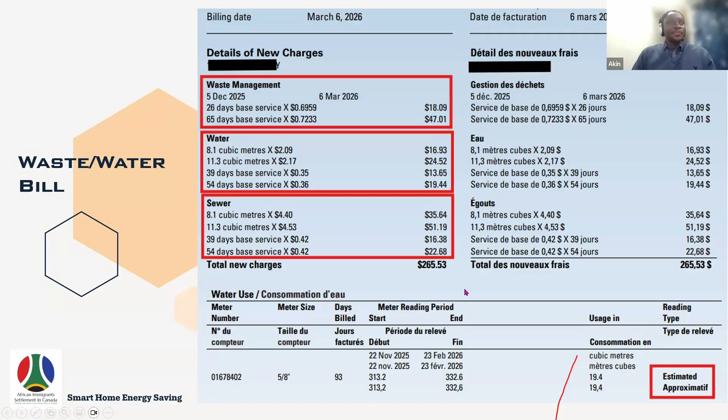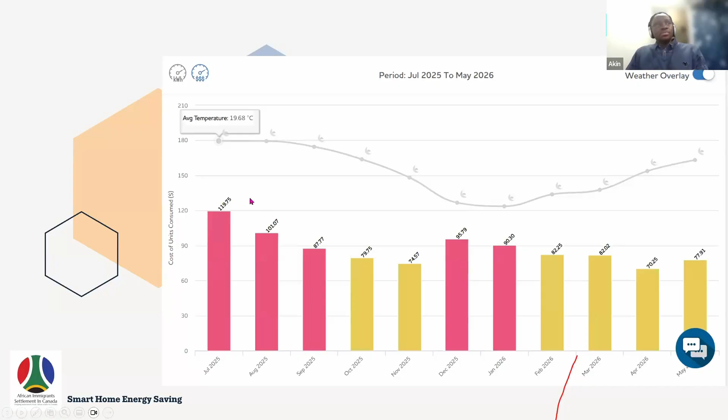For example, if we are using an electric stove to cook our food, whether it is summer or winter, we still use it. The only thing that may change during this time is maybe during longer nights, we may need to turn our lights on for a longer period of time. And maybe because in the winter people stay more at home, it may increase energy use for appliances, for watching TV and other things like that. So the idea of this graph is just to show how weather interacts with energy use.

For electricity, it's going to water heating, to appliances, to cooling, and to lighting. So that is where the remaining 40% is going. So now, if I want to save on natural gas, which is basically for heating, what are the areas in my home that I'm going to look at? So that's going to happen in the next slide.

So as we can see, this picture at the right hand side, this is the building envelope. When I say building envelope, I'm referring to everything that encloses your home: the wall, the windows, the doors, the floor, and the roof. So if you look critically at this picture, we see how much of the heat we have in our home is going out through each of these different media.

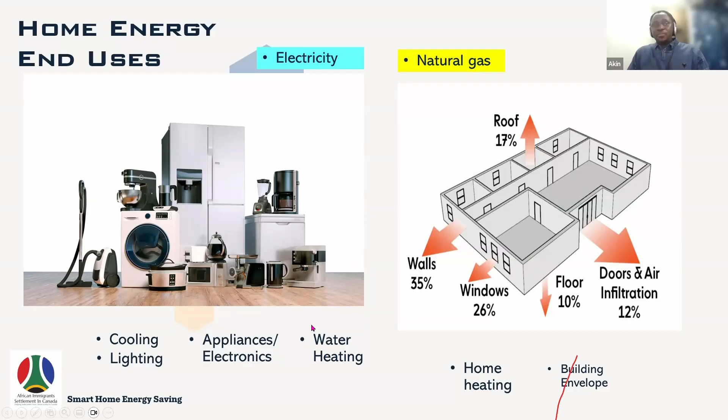So the next aspect is electricity. Your appliances, lighting, water heating, cooling, this is where the electricity is going to. So if your home has a natural gas boiler for heating water, this might not be applicable here, but I believe most homes are using electric water heaters. So if I want to save on natural gas and electricity, what are the things that I'm supposed to do? First of all, we deal with natural gas.

As we explained before, all the natural gas is being lost through the envelope. So the building envelope has to do with where natural gas is being used. So if I want to reduce natural gas, I'm going to deal with air leaks. Where are the aspects of my home where I see leakages? Maybe if you are cooling your house during the cooling period as we are now, we want to retain the cooling as much as possible in our home. So we need to seal up. Maybe there are gaps in the window, gaps in the wall or wherever. We need to deal with that. There is actually an instrument that you can use to see if you are having leakages in your home.

Another thing is insulation. Insulation is just like what is inside your wall to reduce movement of heat between outside and your home. So we need to work on the insulation to reduce the amount of natural gas we are using. Also, if you have a basement, we need to pay attention to it. If we find out that there are some leakages through the basement, the windows of the basement are not properly locked, that is enhancing some infiltration into the home, we need to pay attention to that.

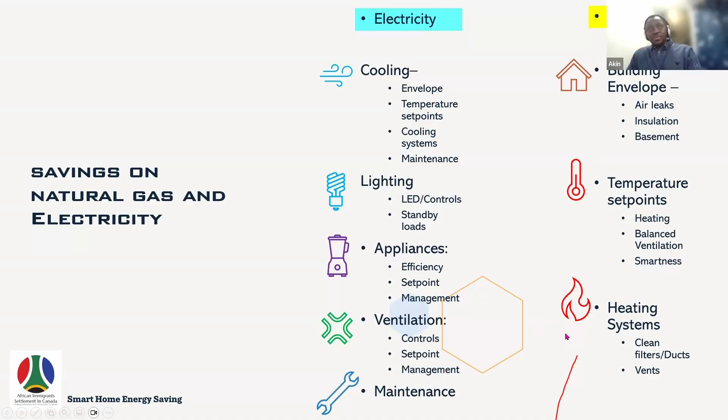So this area is mostly for people that are interested in buying a home, or you have an old home that you want to upgrade to enhance energy management in your home. So these are the areas that we can look at when we are buying a new home, or when we have an old house and we want to upgrade it.

So when people want to do an upgrade for a new home, in most cases we always concentrate on physical things like, help me change this doorknob, I want this type of cabinet, I want this type of floor. But in most cases, we don't pay attention to how we can upgrade our new home to reduce energy use. If I upgrade my cabinet, I just upgrade it for aesthetics, just for it to look beautiful. It's not making me money. But any upgrade we do towards energy savings, those are the ones that are going to bring you money.

When I say bring you money, if you spend a particular amount of money, for example, I want to build a house now. A builder will always build your house to the minimum building code, the building requirements by the city. So they don't go beyond the minimum for their own profitability. So it is left for us to say, I want to go a step further in my new home to reduce energy use. For example, if you want to put insulation on your wall, I think by building code R22 is the minimum. That is what they give you in your house.

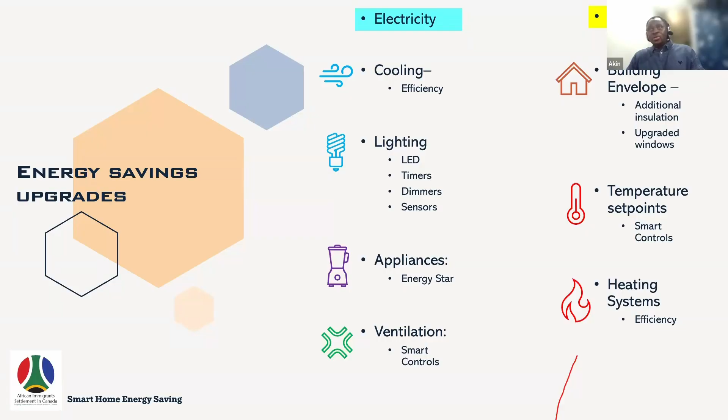So for us to stay comfortable at home, we need fresh air because most homes in Canada are tight, meaning that air is not just entering as draft or leaving the house. So if we are not intentional about how we are bringing fresh air into our home and how we are taking out stale air, we might be having insufficient oxygen in our home, which is not healthy for us.

Apart from that, humidity is also a very important consideration. In our homes, the humidity is basically how much water we have in the air at home. If it is too much, it's not good. If it is too dry, it's also not good. So we need to strike a kind of balance. So typically anything between 35 to 50% is good. So when we have humidity in our home that is rising to 60%, which you can also see on your ventilation control on the screen, you can see what the humidity is. So we should pay attention to that.

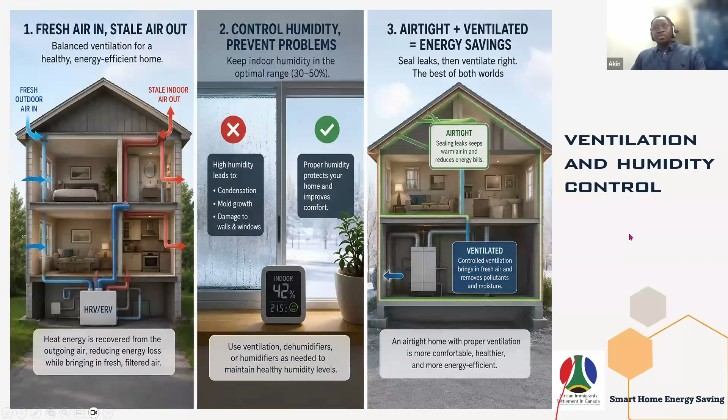On the other hand, if you are having a lot of condensation on the wall, on the window, everywhere, you touch your sink or your toilet and you are seeing condensation everywhere, it's an indication that there is too much water inside your home. So in that case, you will need a dehumidifier to reduce the excess water in the home. So both ventilation and humidity, they go hand in hand.

I've talked about why ventilation is important, so I will quickly talk about mechanical ventilation. So there are two ways we can control ventilation in our home. It's either we use mechanical ventilation, which is let the machine do the job. Just set the ventilation system. If you need fresh air at home, you can set that and just ensure that you have enough oxygen and the indoor air quality is appropriate for the occupants of the home.

The other one is natural ventilation, which means you don't want the machine to do it, you want to do it by yourself, which is basically opening your windows or doors and letting fresh air enter. The difference between the two is when you go for natural ventilation, you are saving energy, right? You don't let your fan run to circulate the air.

But when you allow the ventilation system to do it, there is always a filter that the outdoor air is passing through. So it's filtering your air, making sure that all the contaminants are being removed and you have higher quality air entering your home. So that's another thing we need to pay attention to. If you just open your window and all the doors, every microorganism and everything is also entering the home. So we should pay attention to that.

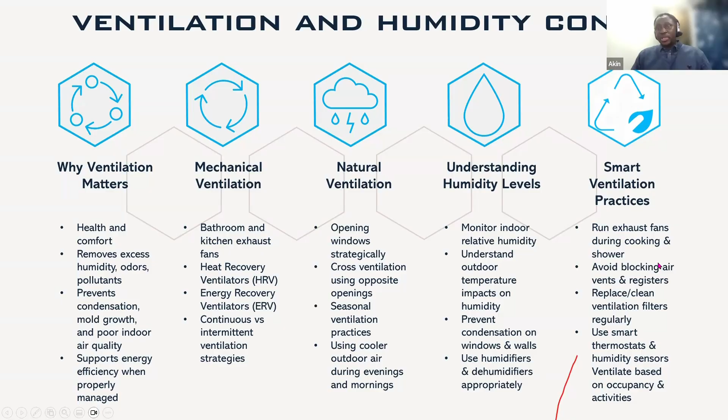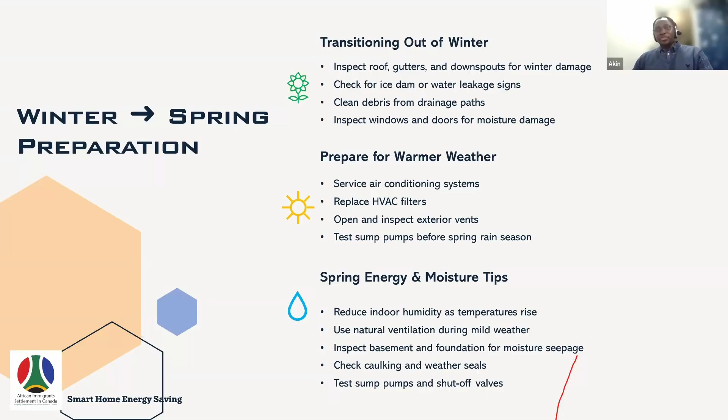Then we should also inspect the foundation of our home to see that there are no leakages. Also, we need to pay attention to the sump pump. Sump pump is the pump that is in your foundation. When we are going into rainy season, there is going to be a serious water level increase in your foundation, and it is this sump pump that brings that water out of your home. So we should make sure that we don't turn off or unplug that sump pump, otherwise when the water level rises it can flood our basement. That's another area we should look at.

So if you are transitioning from fall to winter, the first thing we should do is make sure we inspect our furnace. If you have an old furnace, you might need to bring a technician to check it and make sure it is working. The earlier we do this before winter, the cheaper it is. These technicians are very busy at the beginning of winter because that is the time most people find out their heating equipment is not working well. So we should also look at that.

Then if there is draft, your window is leaking, there are minor repairs we should do. You can buy caulk from the store and use caulking to seal up any draft.

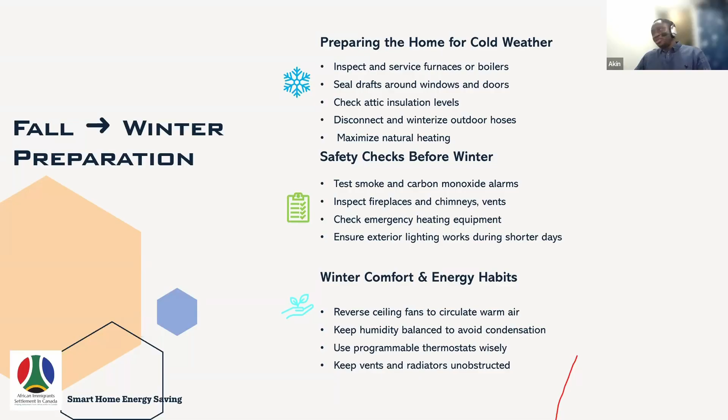Also, we should check our smoke detectors to make sure they are working perfectly, so that when there is any source of carbon monoxide in the home, it is actually detected. In some houses, when we see smoke detectors or CO detectors beeping, it means the battery has run out, and at that point those smoke detectors are not working. So when you hear beeping from those smoke detectors, we should, as fast as possible, replace those batteries to make sure they are working. Because if they are not, there might be dangerous gases in your home and you will not know. So we should not ignore those signs.

So these are safety practices. I've just run through some safety practices that we should look at, starting with the carbon monoxide issue I just talked about. We should make sure that your smoke detectors are working well, and we should replace the batteries.

So when we replace batteries, even when they are dead, we should cover them. If it's a new one that we have, you can just use tape to cover those two terminals to make sure they cannot come in contact with any metal.

Inspect your fireplaces and chimney yearly. Keep portable heaters away from curtains and furniture. When we are using portable heaters for any reason, we should pay attention to make sure nothing is blocking it, it's not close to anything flammable, and it's not covered by cloth or anything, because it can cause fire.

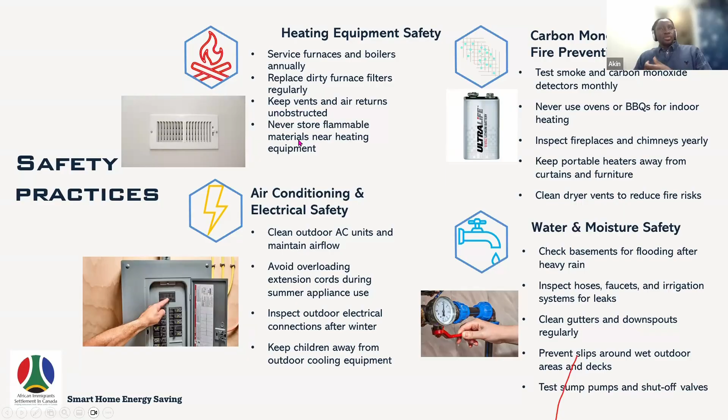And also, I've talked about the vents. Servicing of your equipment is very important. Keep the vents unobstructed, and don't store flammable materials near your heating equipment.

So I will quickly talk about how to save water. If there is any leaking plumbing in your house, we need to pay attention to it and fix it as soon as possible. We can also install water saving fixtures. There are some taps in our house that are very water efficient and don't waste water like other ones, so we should look at that.

When we are using water for our garden and lawns, we should always know that as we are paying for the water, we are also paying much more for the sewage, which isn't even applicable when we're using the water to water the lawn. So let's also look at that.

The last part is the energy rebate. What energy rebate means is it's not like government is giving free money, but they want energy retrofits and upgrades in your home to be less burdensome for everybody. For example, if you buy a new window, before you can make your money back, it might take up to 10 years, or let's say 5 years. But if government pays part of that, it makes your payback period closer, and you'll be able to break even very shortly after completing the project.

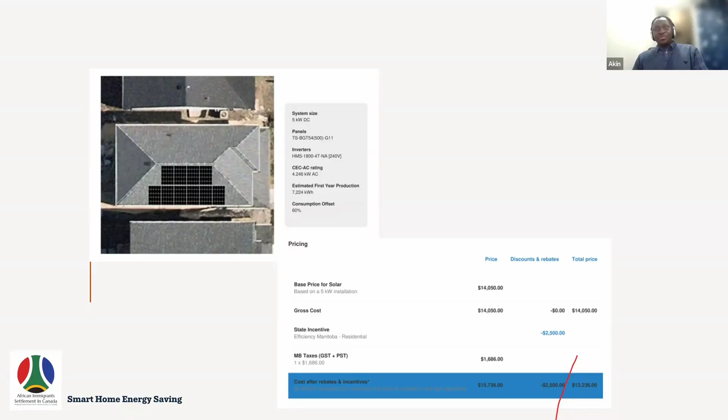If I get this 5 kilowatts, it's going to cost me about 15,000 to install. By the time I get the rebate and everything, I'm going to get 2,500 in rebate, and it's going to cost me eventually 13,000. When I did this analysis, it might take up to 10 years before I make my money back. But the good part is this solar panel can last up to 25 years, so after 10 years of paying off everything, I can be using free electricity for the next 15 years. So that is something you can also consider if you have interest.

So that is the end of the presentation.

If we are open to questions. Hello sir, I'm sorry, I was having some difficulties unmuting myself. Thank you so much for that power-packed presentation. I've taken a lot of lessons from it, and I believe a lot of other people on the call has as well. So it's time for questions. I've checked the chats, and there are no questions there. I don't know if anyone has questions to ask. If you have any questions, you can just unmute yourself and ask, or maybe raise your hand, or even put the questions in the chat box, whichever one is comfortable for you.

I think there's a question in the chat. Someone is asking, is it possible to upgrade the already installed insulation in the house? If the house is recent and you just installed some insulation, it's going to cost you a lot more to upgrade the insulation that you just did.

Like I said, this has to do with the payback period. If I upgrade any part of my home, I'm spending a lot of money, and I want to save a lot of money over time to cover what I've spent. So if we are upgrading an insulation that is already done and to some extent still recent and still good, it's going to cost you more, and your payback period might be 20, 30 years - it's not going to be economically okay. But if it's a very old building where the insulation is very old or there's no insulation at all, great, that is something one can consider.

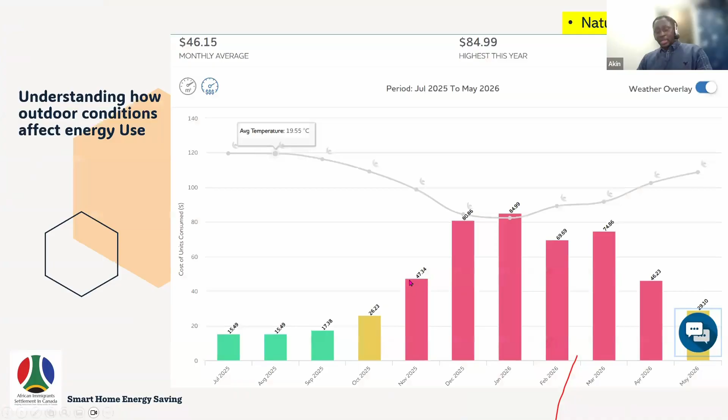And a programmable thermostat controls how much you heat or cool the house. There are a lot of small things that we don't pay attention to that can save us a lot of money. Like instead of using hot water to wash your clothes, you can just use cold water. It's almost the same effect, except if you have some special clothes, maybe based on the type of work you do, you have to sanitize or treat those clothes.

But ordinarily, everybody should use cold water to wash clothes, or reduce how much water we spend on showers and all of that. So those are the different areas. It doesn't have to be big projects that we are talking about. A 10-year-old house is still very efficient compared to houses that are 80, 100 years old. So at 10 years old, you might not need a very big improvement. But first of all, where you are at this present time matters a lot.

Thank you so much, sir. I have two questions. The first one is about the prepaid plan for hydro. Do you think it's a good idea? And the other one is about the Efficiency Manitoba email that you talked about. Is that sent generally to users, or are we supposed to request it some way? I can't remember how I started receiving them.

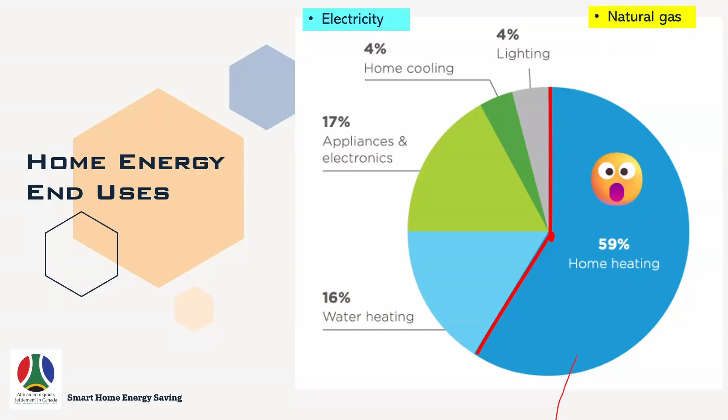Thank you so much, sir. I don't know if there's any other question in the chat. For some reason, mine isn't updating. Okay, I have another question here. Can you explain what the numbers on thermostats represent? There is one that's raised as a percentage and another one beside it; which one represents the humidity? Let me quickly go to that particular slide.